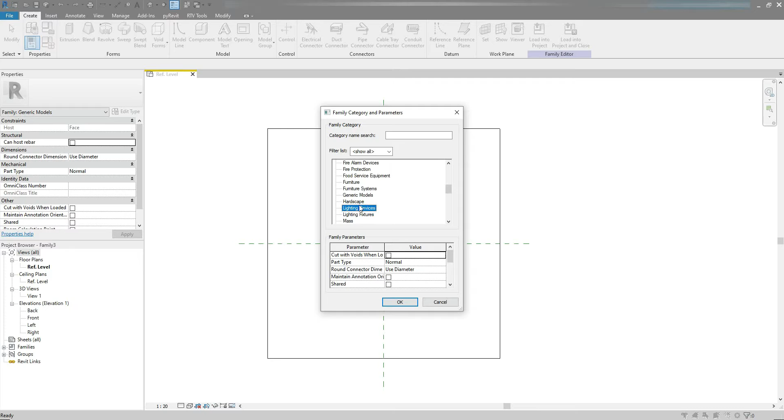Straight away I'm gonna go to Family Category and Parameters and change the category to Lighting Devices. On my keyboard I'm gonna press Ctrl S to save the family. I'm gonna call it Illuminated Exit Sign, and from the options change the maximum backups number to 1. Hit the Save button.

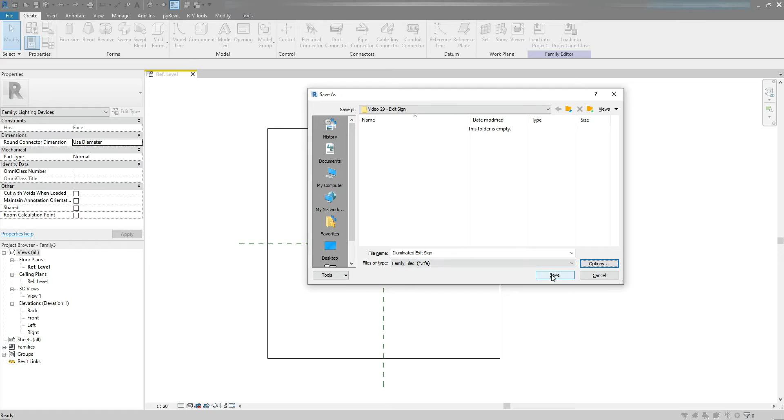Next I go to Create tab, Forms panel, Extrusion. From the Draw panel I'm gonna choose Rectangle. Set the extrusion depth to -50 and draw a sketch. Let's make it 460 mm long and 120 mm wide.

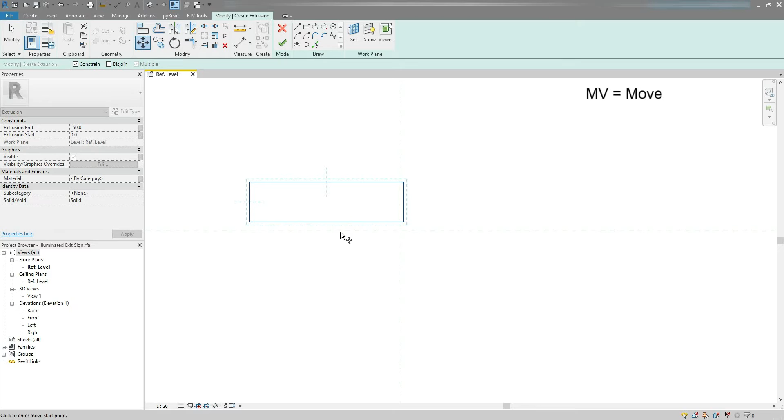I'm gonna select the whole sketch, press MV on my keyboard to move, and move it to the center. I'll select the whole sketch again, MV on my keyboard, and move it to the center. Finally hit the Finish Edit Mode button. Let's go to 3D view just to check.

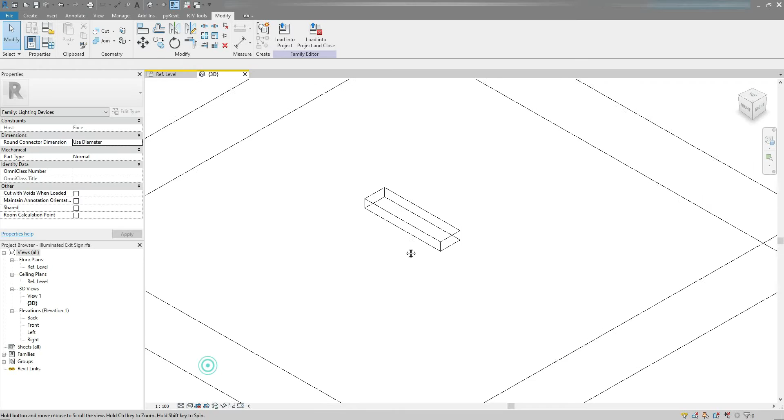Yep, that's what I want. I go back to Ref Level View and create one more extrusion.

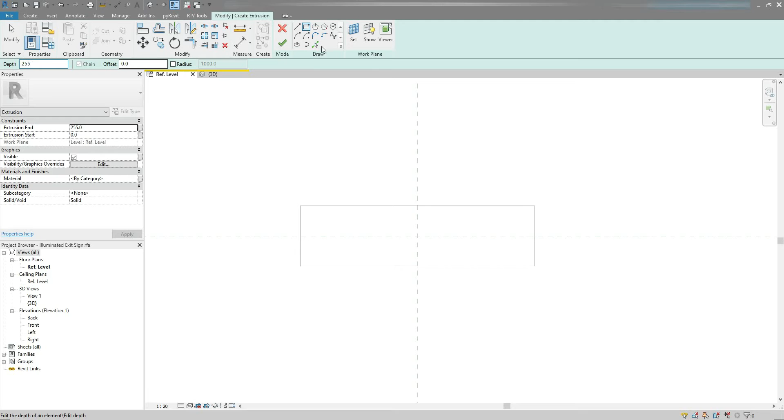Again, Create tab, Forms panel, Extrusion. Choose Rectangle from the Draw panel. Set the extrusion depth to 255 and draw a sketch. Let's make it 50 mm wide and 400 mm long.

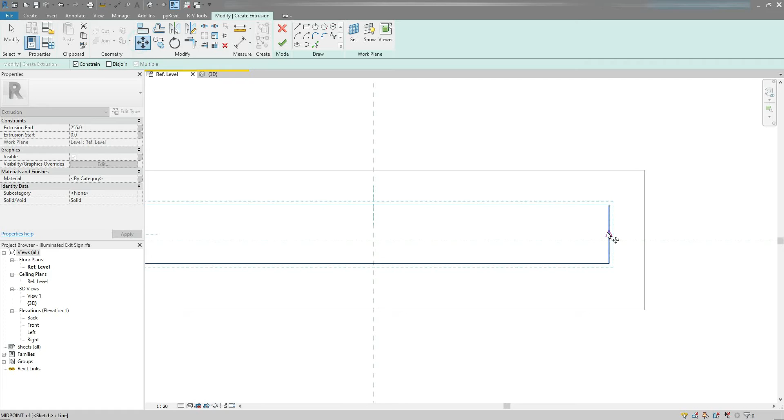I'm gonna select the whole sketch and move it to the center. Hit the Finish Edit Mode button. Let's go to 3D view just to check. Yep, that's what I want.

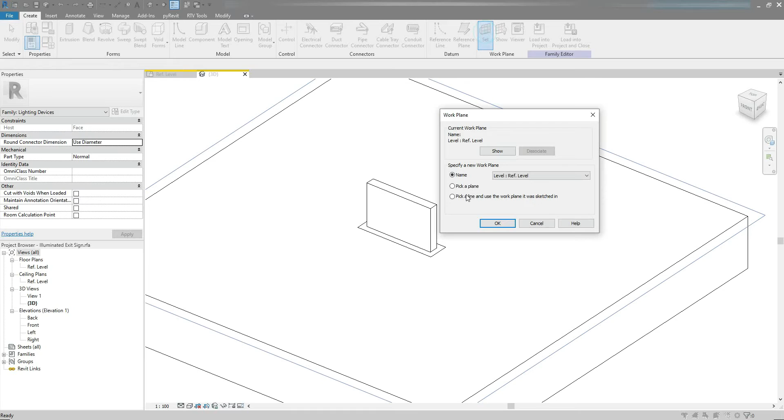Then I go to Create tab, Work Plane panel, press Set button, choose Pick a Plane option, OK, and set this surface as a current workplane, just like so. Let's go to Extrusion again.

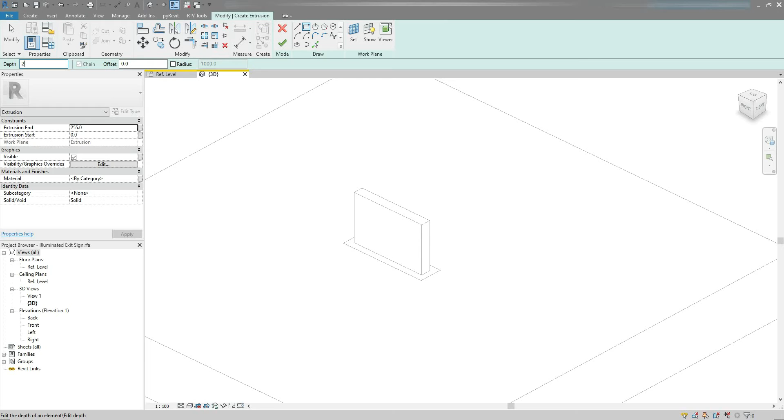Choose Rectangle, set the extrusion depth to 2.5 and draw a sketch. Let's make it 235 mm high and 380 mm wide. Now I'm gonna center it.

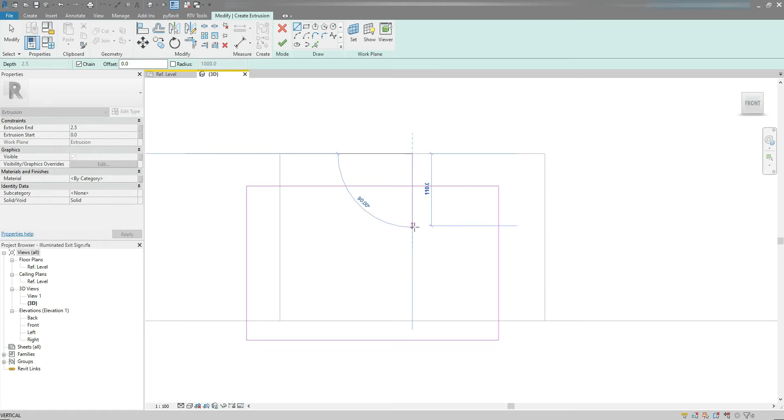I'm gonna hover over it, press Tab key to select the whole sketch and move it to the center. Again, I'm gonna hover over it, press Tab key on my keyboard to select the whole sketch and move it to the center.

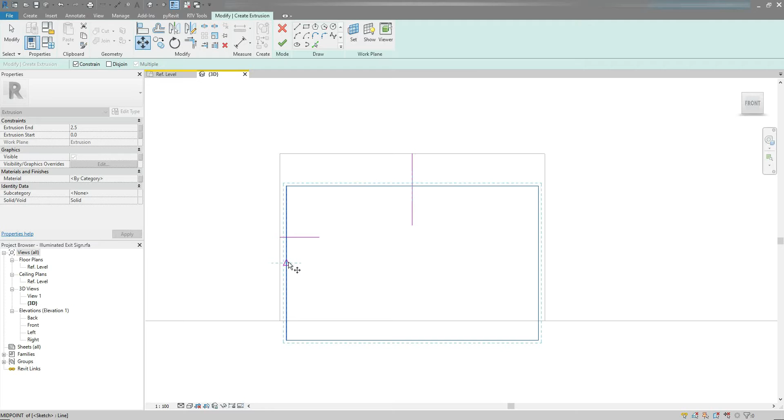Now I'm gonna delete these two lines and finally hit Finish Edit Mode button, just like so.

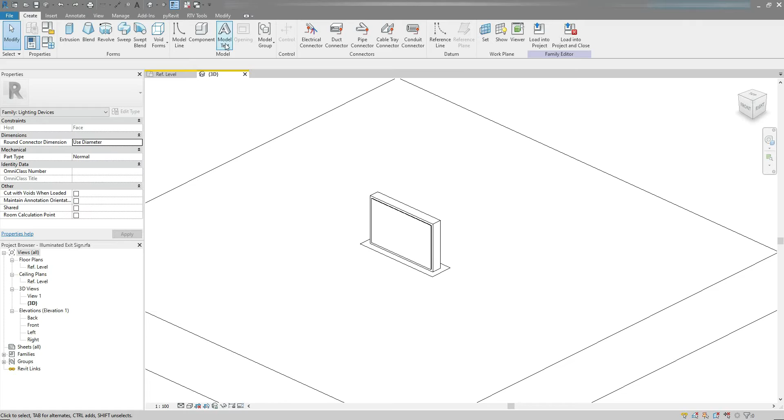Next I'm gonna go to Create tab, Model panel, select Model text. Let's type Exit. OK, I'm gonna click to place it. Select the text, and from the Properties dialog box I'm gonna change the depth to 5.

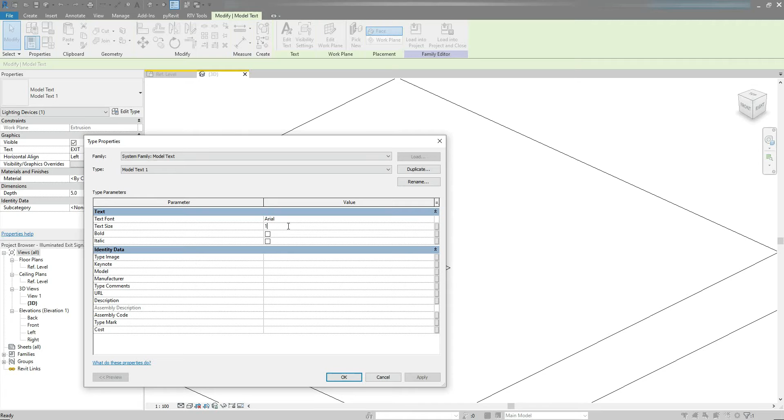Then I'm gonna go to Edit type, change the text size to 120. OK. And then using arrow keys on my keyboard I'm gonna center it, just like so.

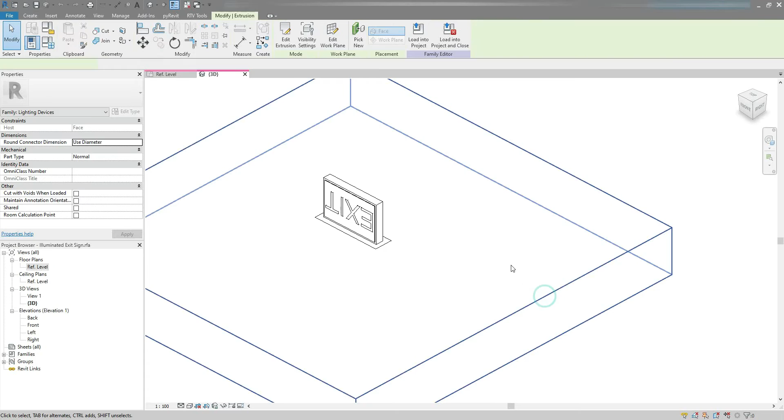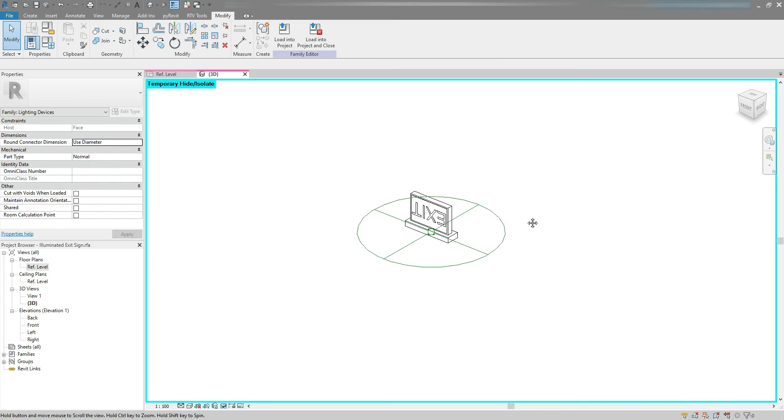Now I'm gonna select this surface, press HH on my keyboard to temporarily hide it. I'm gonna rotate it so I could see the back side of the back panel. I'm gonna go to Create tab, Connectors, choose Electrical Connector, select this surface, just like so, and finally reset Temporary Hide/Isolate Mode.

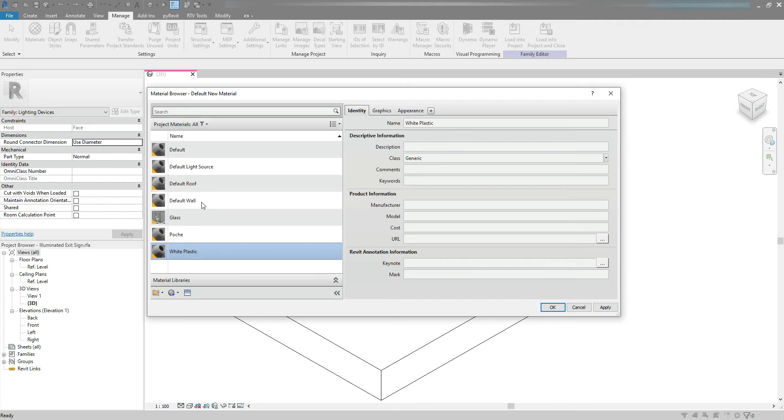Now I'm going to go to Manage tab, Materials. I'm going to create a new material. Let's call it white plastic. Then I'm going to go to Appearance, duplicate this asset, and replace this asset with, let's replace it with PVC white.

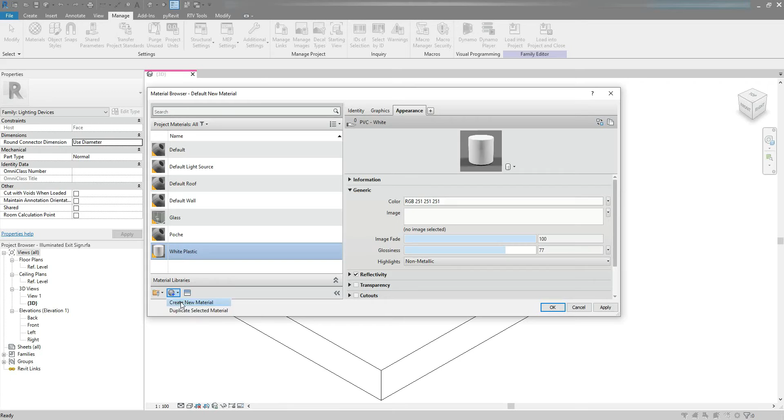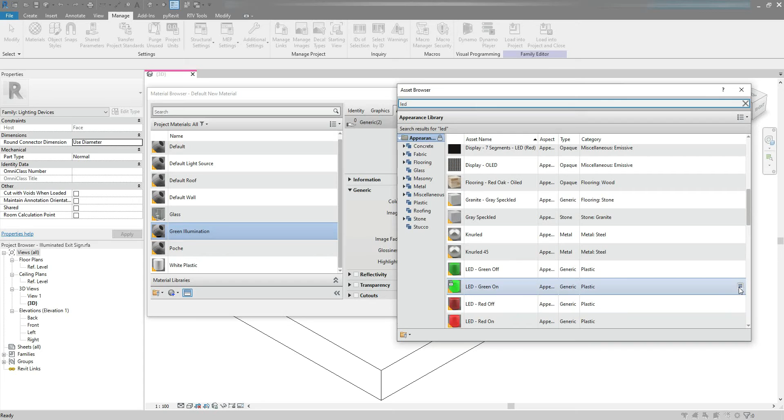Then I'm gonna create one more material and call it green illumination. Appearance, duplicate this asset and replace this asset with, let's replace it with LED green on, and finally hit the OK button.

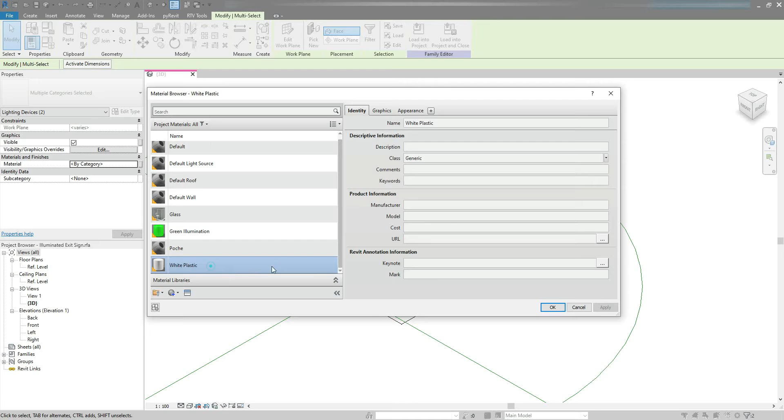Now let's select this extrusion and this text, and from the properties dialog box let's change the material to white plastic. Then I'm going to select this extrusion and change material to green illumination, just like so.

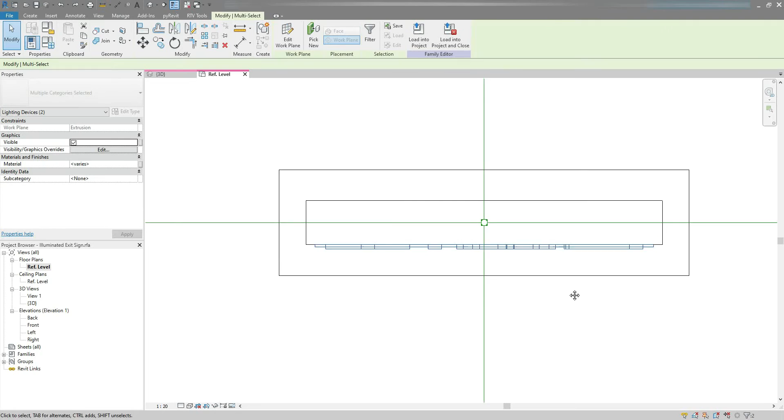I'm going to go to Ref Level View, select this text and extrusion. On my keyboard I'm going to press DM and mirror it around this center.

And I'm going to press Ctrl Z to undo it, select the text, and here in the Properties dialog box I'm going to change horizontal alignment to right.

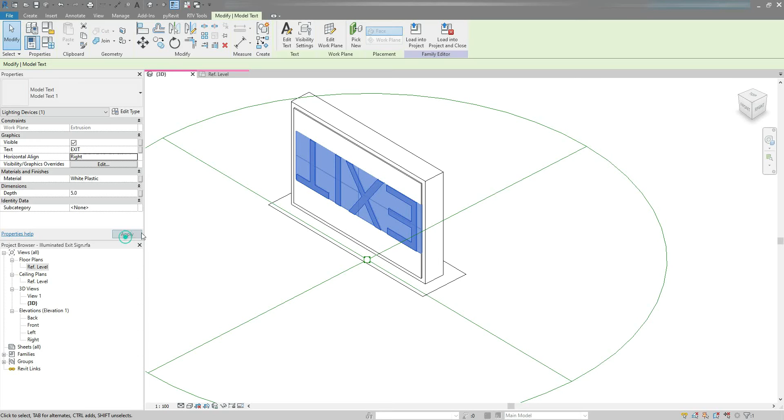And again I'm going to go to Ref Level View, select the whole thing, this extrusion and the text, DM on my keyboard, and mirror it around this center.

I'm going to go to 3D view just to check. Yep, looks good. It's time to test it. So let's load this family into a primitive project.

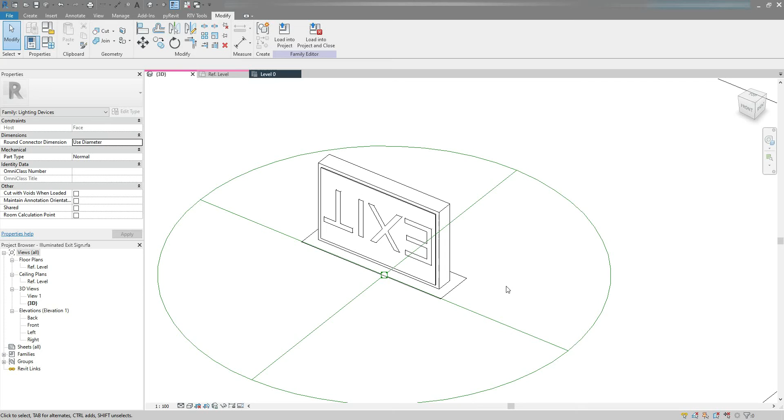I'm going to choose Place on Face. I'm going to press spacebar on my keyboard to rotate it. Click to place it. I'm going to select it and press BX on my keyboard for a selection box.

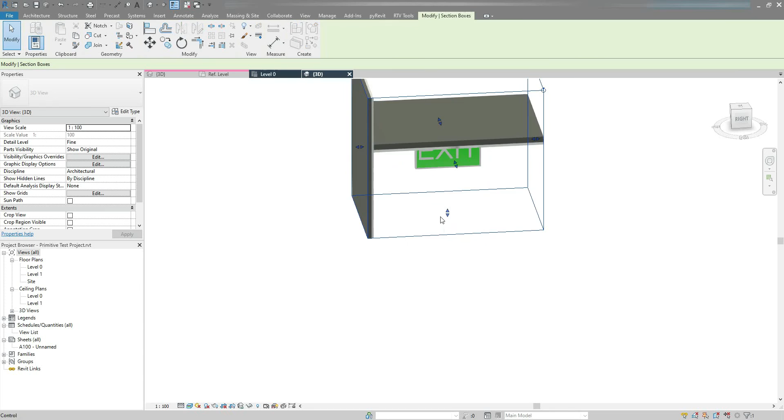I'm going to change to wireframe. I'm going to change it back to realistic. Looks good to me.